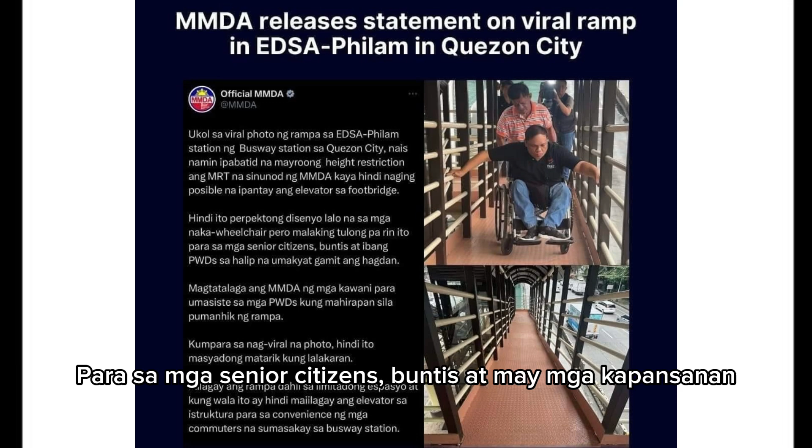I'm Architect Chocho. Kamakailan ay umani ng mga puna at pambabatikos sa social media ang nag-viral at naging sentro ng kontrobersyal na proyekto ng MMDA na isang busway sa EDSA, PhilAm, Quezon City, na kung saan ay napuna ang matarik na slope ng rampa na para sana sa mga PWD or persons with disability. Ayon naman sa MMDA, ginawa ang proyekto para sa mga senior citizens, buntis, at may mga kapansanan. Dahil dito, marami ang nagtatanong, bakit naging matarik ang rampa kung dumaan ito sa tamang disenyo ng rampa na para magamit ng persons with disability or PWD?

Since the concern is about the issue of the constructed steep ramp, let's revisit the design standard under BP 344, particularly the ramp for the PWD, in order to let them access the ramp through the use of the wheelchair. On this illustration, I will show you the design standard of the ramp under BP 344.

So what is BP 344? The Law to Enhance the Mobility of Disabled Persons, or Batas Pambansa Bilang 344, is an act to enhance the mobility of disabled persons by requiring certain buildings, installations, establishments, and public utilities to install facilities and other devices. When it comes to designing public places for the mobility of our disabled persons, we have design parameters for accessibility of the PWD in public places and in establishments under the provision of BP 344, commonly known as the Law to Enhance the Mobility of Disabled Persons, which was approved and took effect since February 25, 1983. The implementing law is 41 years now, as of this July of 2024.

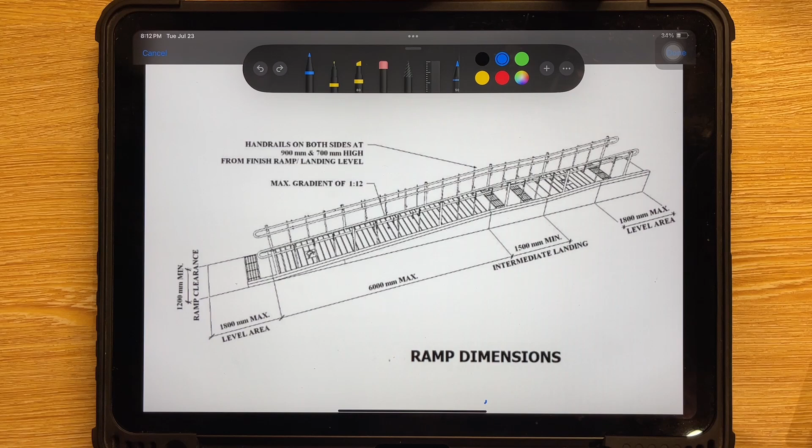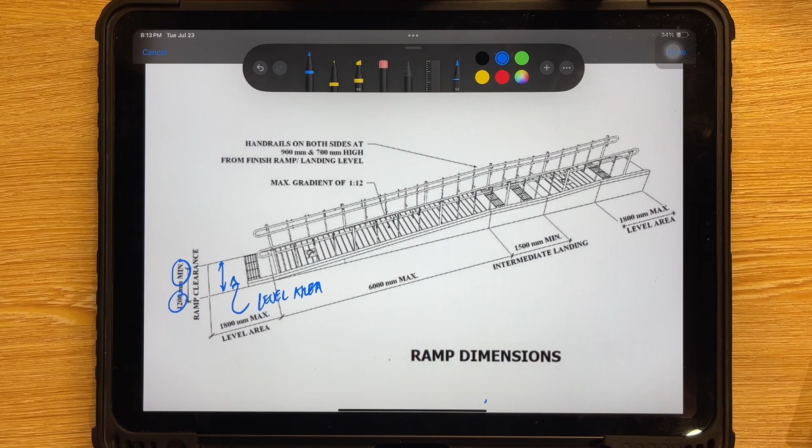Number 2 is that the ramp shall have a minimum clear width of 1.2 meters. So under this illustration, we have here the clear width of 1.2 meters. This is the width of the ramp, the 1.2 meters, and this is the minimum, so you can go beyond the 1.2 meters. Now this is the level area, and this is the clear ramp clearance for the width of 1.2 meters.

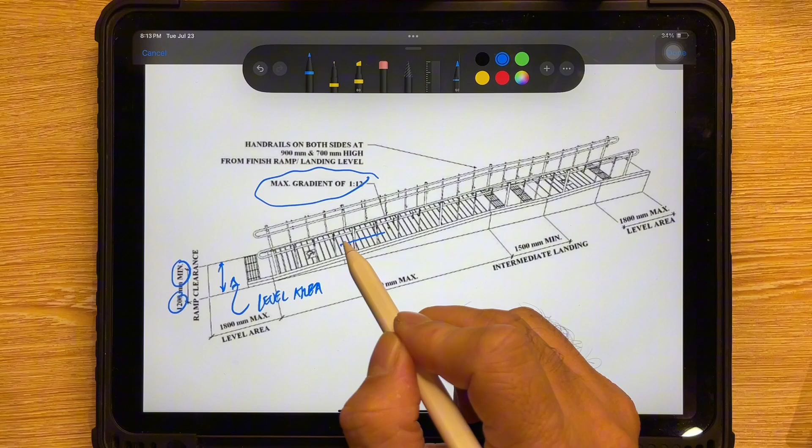Number 3 says the maximum gradient shall be 1:12. So here we go, this is the 1:12 or the maximum gradient. The gradient is the inclination of the ramp, or the steepness of the ramp, as you see here in this illustration. Now, how do we interpret the 1:12?

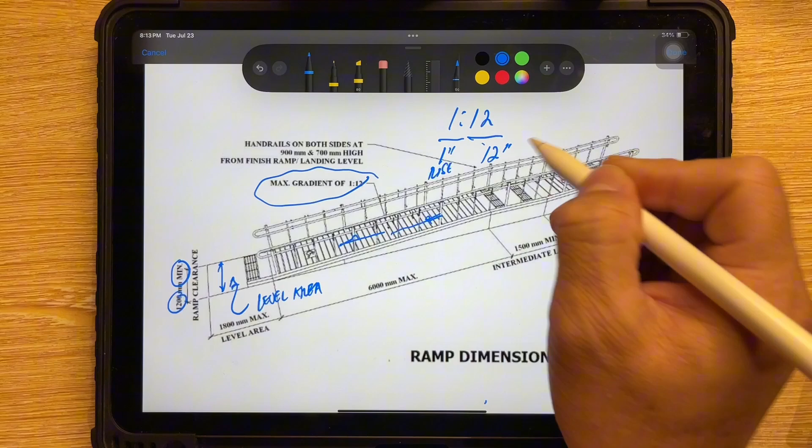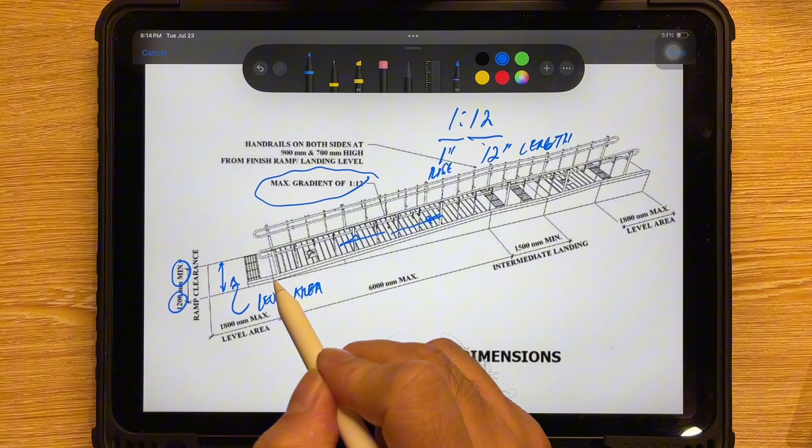The 1 stands for 1 inch, so that is the rise. The 12 is 12 inches, so that is the length. It says that for every length of 12 inches of the ramp, say you have the 12 inches here, you have the rise of 1 inch. So like this, you have the 12 inches, now you have the rise of 1 inch.

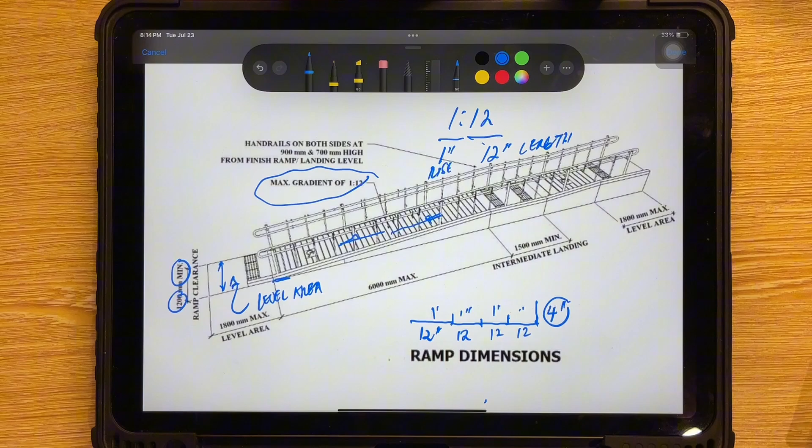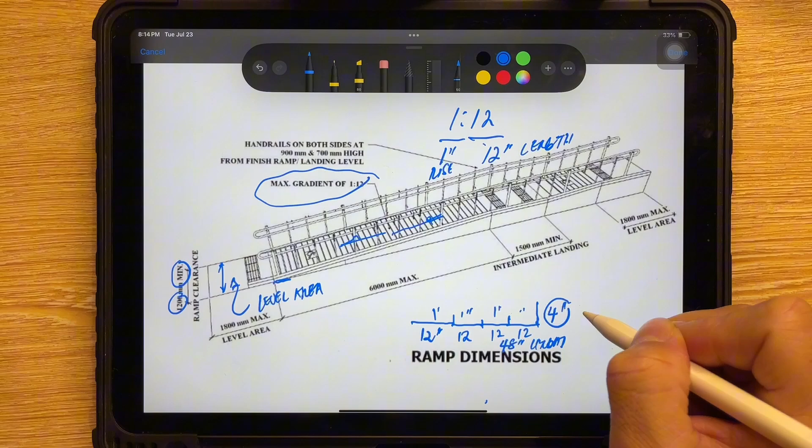So it adds up depending on how many inches you put in your ramp. For example, you have 12 inches, another 12, another 12, another 12, so you have 1 inch, 1 inch, 1 inch, 1 inch rise. So the rise of the ramp will be 4 inches. Here you have 12 plus 12, so 24, giving you 48 inches length of the ramp with a rise of 4 inches. That is the interpretation of 1:12.

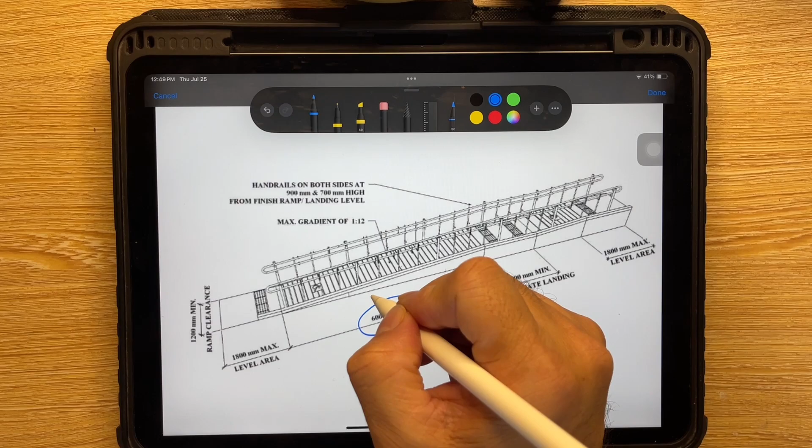Let's get the ramp inclination by two methods, by degree and by percentage. Given the value of the ramp length of 6,000 millimeters, let's convert this 6,000 millimeters into meters, so it will be 6 meters. Now 6 meters converted to inches will be 236.22 inches, so that will be the length of the ramp in inches.

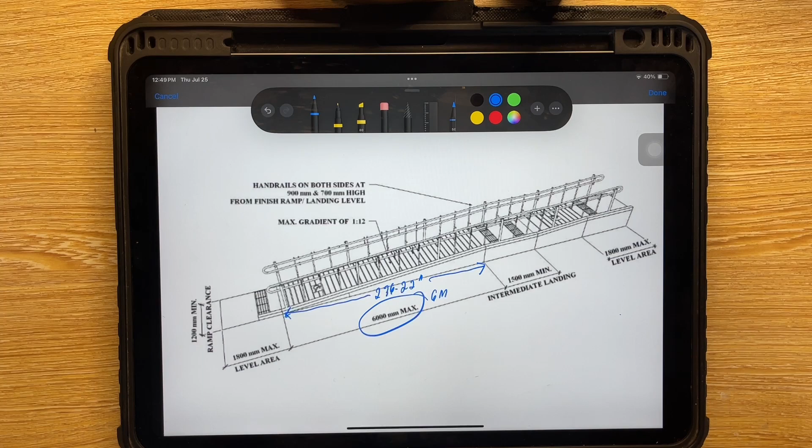Now let's compute for the height of the ramp and the ramp inclination by degree. First, we have to find the value of the right angle. So this is the inclination of the ramp, so we have here the right angle. This is the opposite side, and this is the adjacent side.

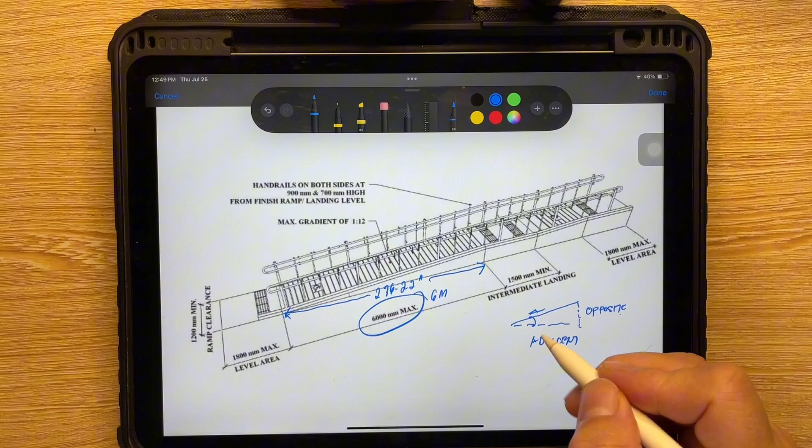So we are looking for the degree of the inclination. Now, on the adjacent side, we already have the value of 236.22 inches. Now, we are looking for the height of the opposite side, which is the rise. So you're looking for the height of this ramp. Now, to get the value of the height of the ramp, we use the 1:12 gradient, which is the maximum gradient.

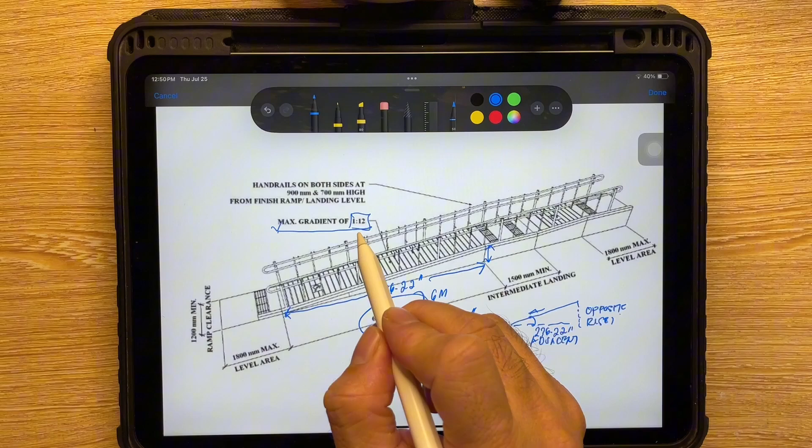So we have here the value of 236.22 inches, which is the length of the ramp, over 12, which is 1:12. So this one is 12 inches. Now the total will be 19.685 inches. So that is closer to almost 20 inches. But we are using this value, the 19.685, to get the exact percentage of the ramp inclination.

Now, using this formula, tangent theta equals 19.685 inches over 236.22 inches. So theta equals inverse tangent of 19.685 over 236.22 inches. Now I already calculated it in my scientific calculator. The total will be theta is equal to 4.76 degrees. Now we can round it off to a 4.8 degree slope. So we're looking for this inclination.

So the inclination will be 4.8 degrees, based on the requirements for the maximum gradient under BP 344. Now the 4.8 degree inclination is the right inclination in order to be an effective and accessible ramp for the PWD under BP 344.

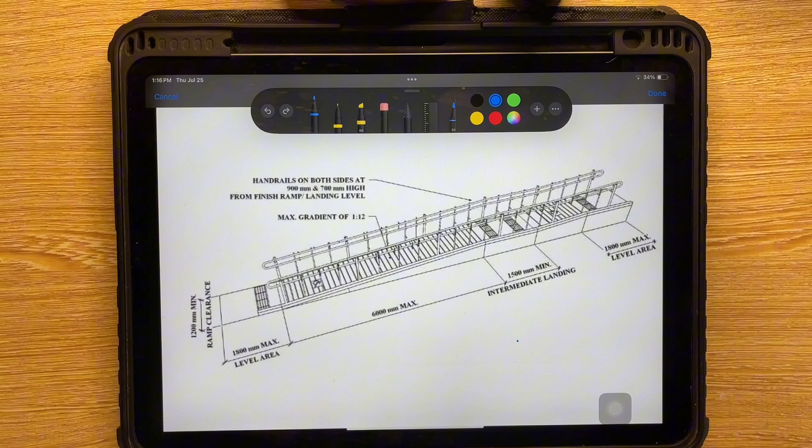Alright guys, now let's move on to the next method of calculating by percentage. Now, given the illustration and the value of the ramp length and height, we already have the length of the ramp in inches. It's 236.22. We already have also the rise. The value is 19.685. Now, we will get the percentage of slope of the ramp.

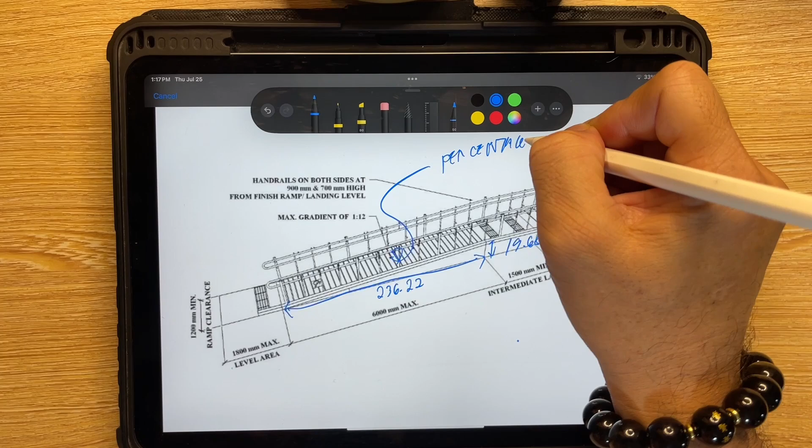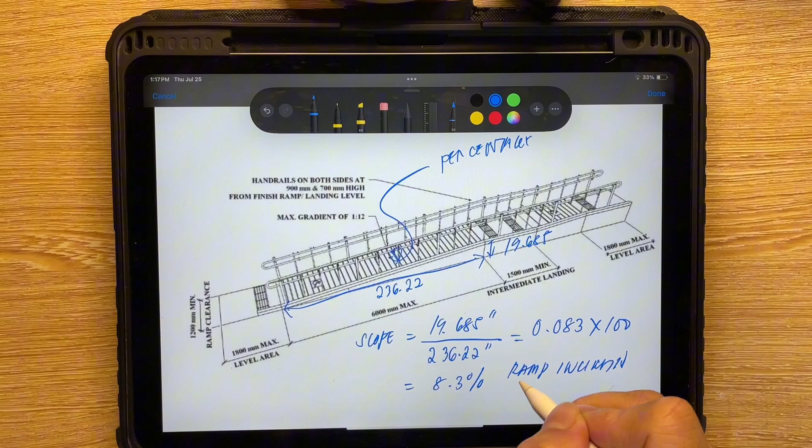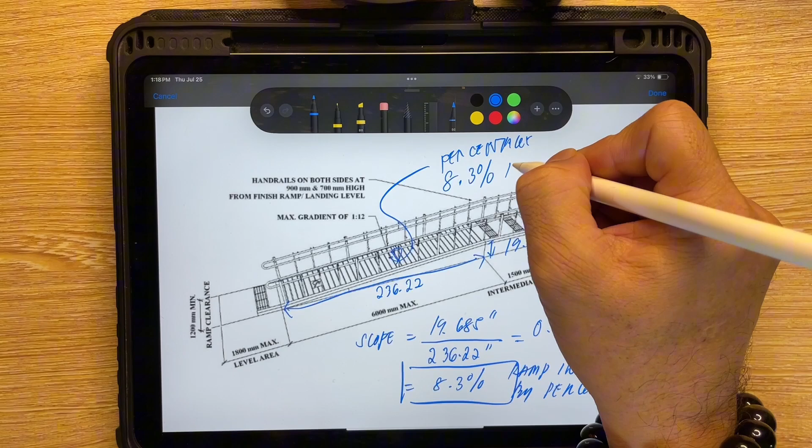So we have here the formula: slope equals the rise, 19.685 inches, over 236.22 inches, equals 0.083, times 100. So we have here the total of 8.3%. So that is the ramp inclination by percentage. So that is 8.3% inclination.

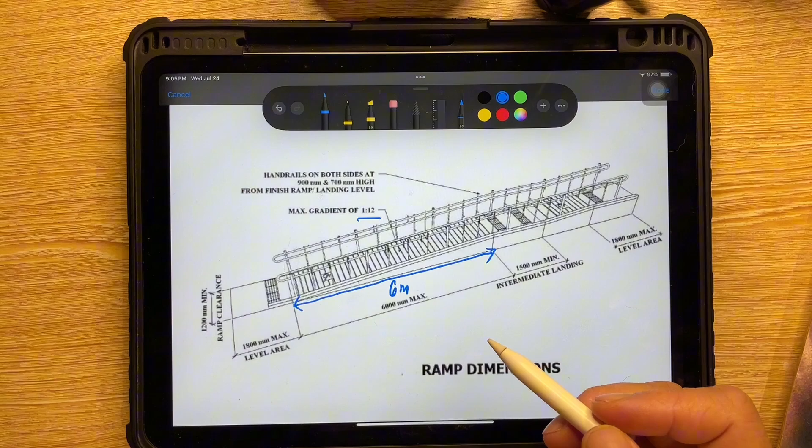Alright, let's move on to ramp design number 4. It says that the length of the ramp should not exceed 6 meters. So we already discussed that the length of the ramp is 6 meters. Now, according to the code, longer ramps whose gradient is 1:12 shall be provided with landings not less than 1.5 meters. Now, after traversing the length of the ramp of 6 meters, there will be a landing. So that's what we call an intermediate landing. So the length of the landing is 1.5 meters. So that is the minimum length of the landing.

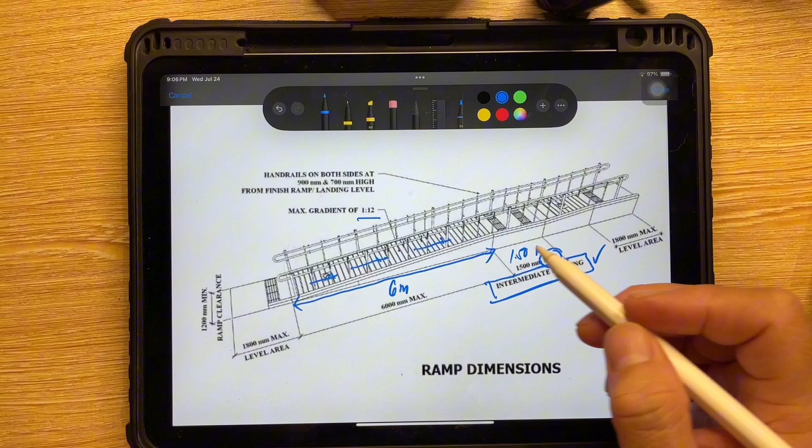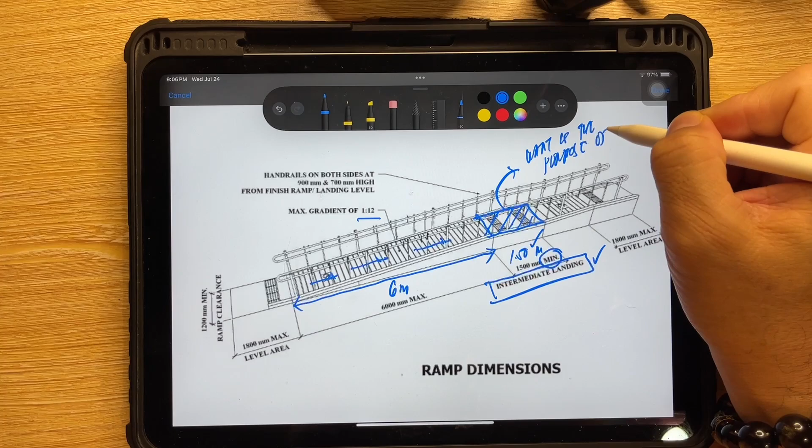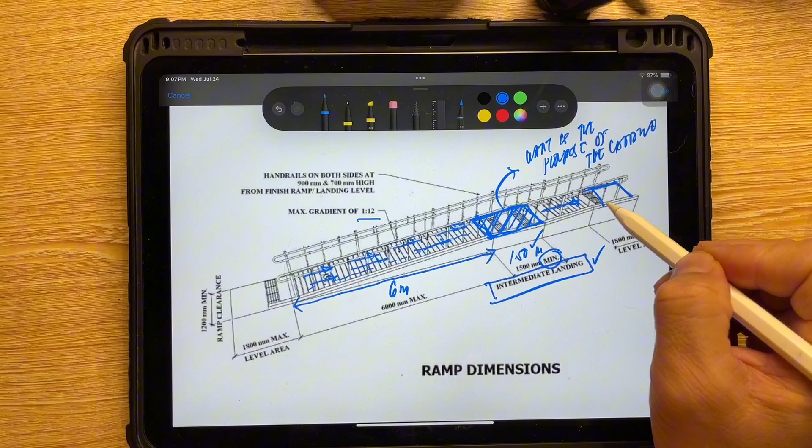So this is the area of the landing with the length of 1.5 meters. Now, what is the purpose of the landing? Now, after the PWD traverses the ramp using their wheelchair, there will be an area or stop where they can relax and take some rest after a long way of 6 meters traversing the ramp. So they can have some time here to regain energy to traverse another ramp going to the level area. So that is the purpose of the intermediate landing.

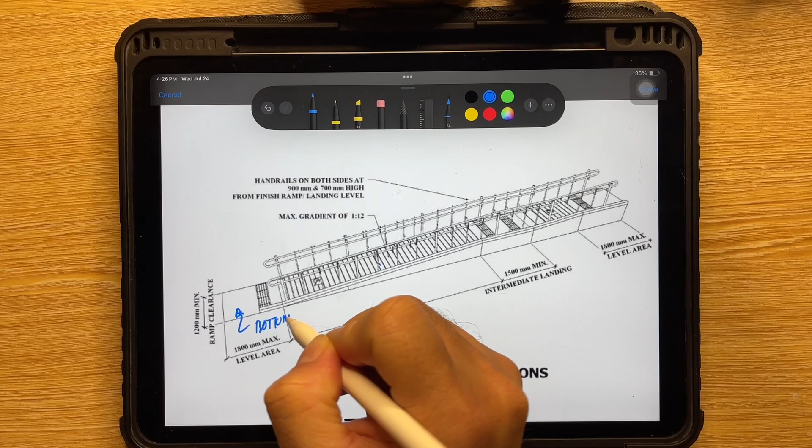Now for ramp design number 5, it says that a level area not less than 1.8 meters should be provided at the top and bottom of any ramp. Now using again this illustration, we have here the bottom. So this is the bottom level of the ramp. Then this is the top level of the ramp. So when the disabled person traverses the ramp, you have here the level area, then we have the intermediate landing as we discussed earlier, then another series of ramps, then going to the level area.

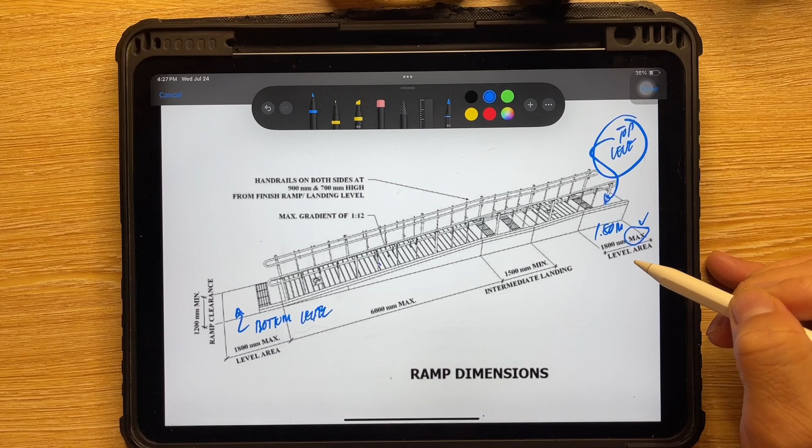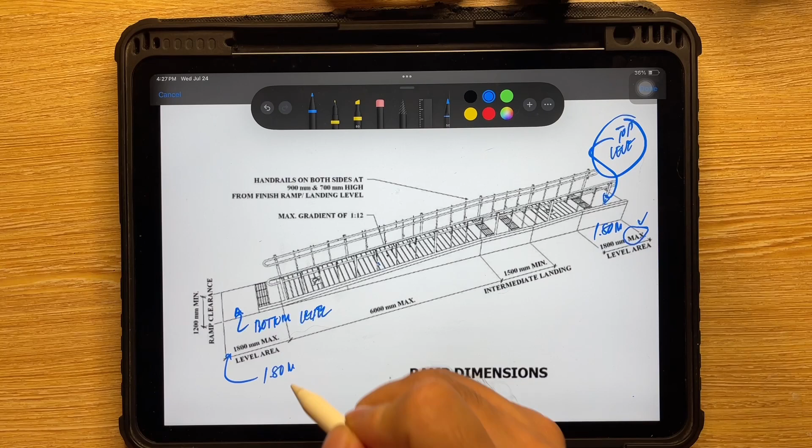According to the code, it should have a length of level area of 1.8 meters. So this is here. So this is the top level area of the landing. Now this is the bottom level area of the landing. So it has also a 1.8 meter level area. So that is the provision for item number 5 of the ramp design parameters.

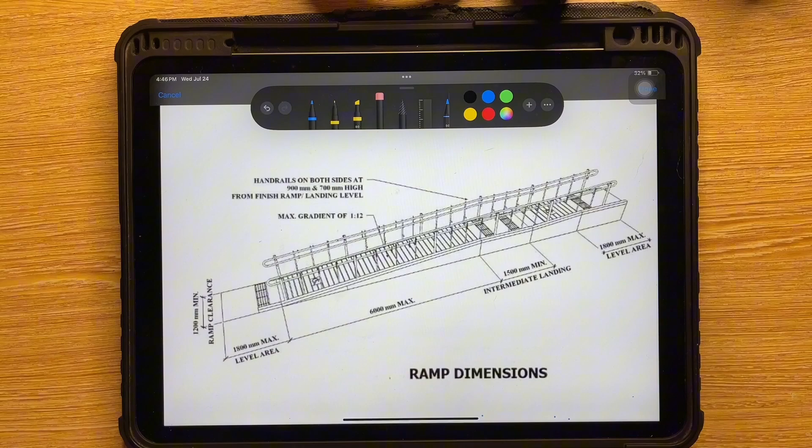Now, moving on to the last but not least, ramp design parameter item 6 says that handrails will be provided on both sides of the ramp at 0.70 meter and 0.90 meter from the ramp level. Now, using again this illustration, you can see here that there are 2 handrails, one higher and one lower handrail. The handrails on both sides are at 0.90 meter and 0.70 meter high from the ramp, or from the finished ramp landing level.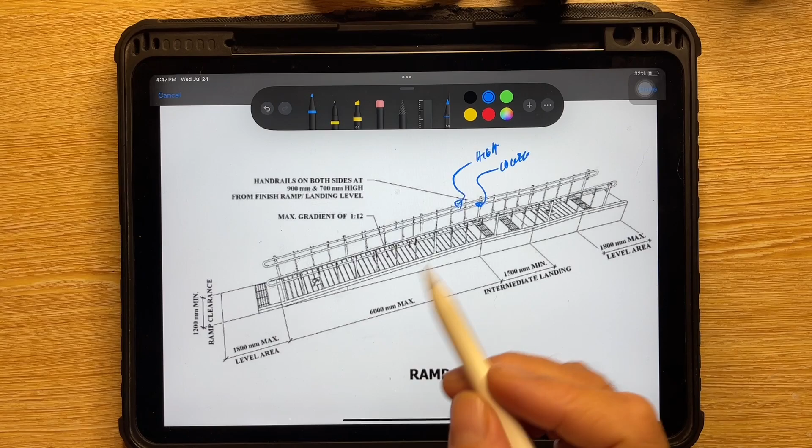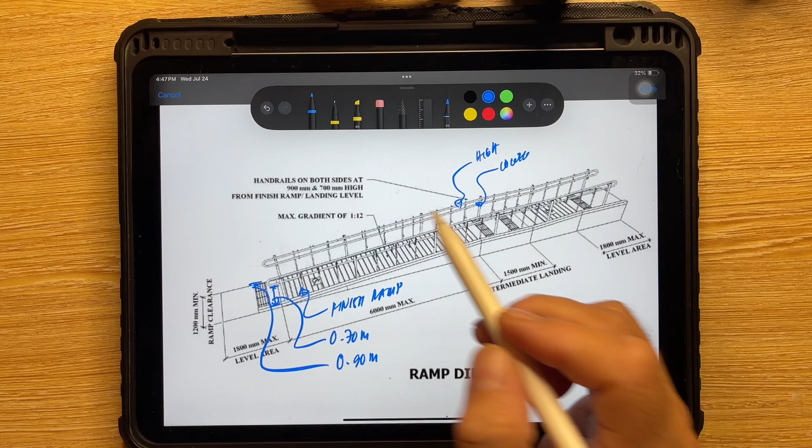So you have here the finished ramp. That is the finished flooring of the ramp. So the measurement from the finished ramp up to the first railing is 0.70 meter. Now the next one, the higher railing, is 0.90 meter. So you have here the 2 railings, the lower one and the higher railing. This serves as protection for our PWD traversing this ramp, and also as a guide while maneuvering their wheelchair over the ramp.

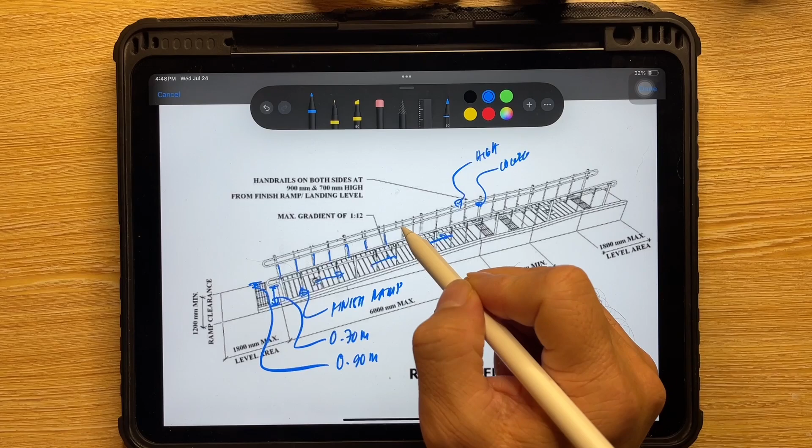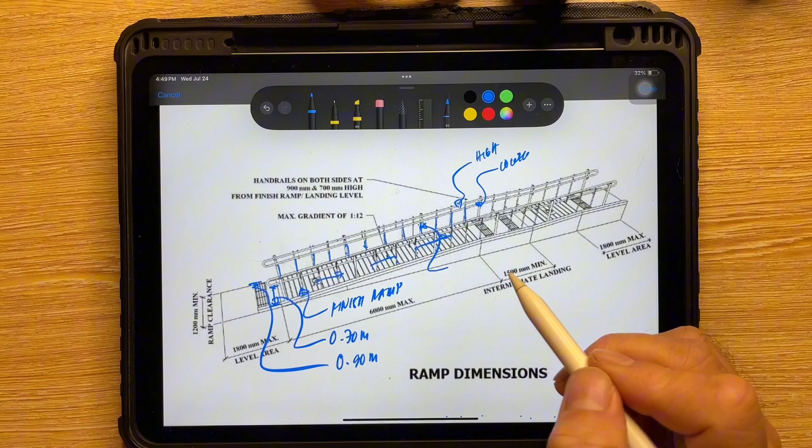And also, this vertical newel post serves as a guide not only for the PWD using the wheelchair but also for the PWD who are blind. By the use of their canes, they can tap on both sides of this vertical newel post to know that they are inside the ramp. So this will be a great help for persons with disability, especially the blind, as their guide. So it will prevent accidents while traversing the ramp.

Alright guys, that will be number 6, the last but not least design parameter for the design of the PWD ramp under the provision of Batas Pambansa Bilang 344 or BP 344, the law to enhance mobility of disabled persons.